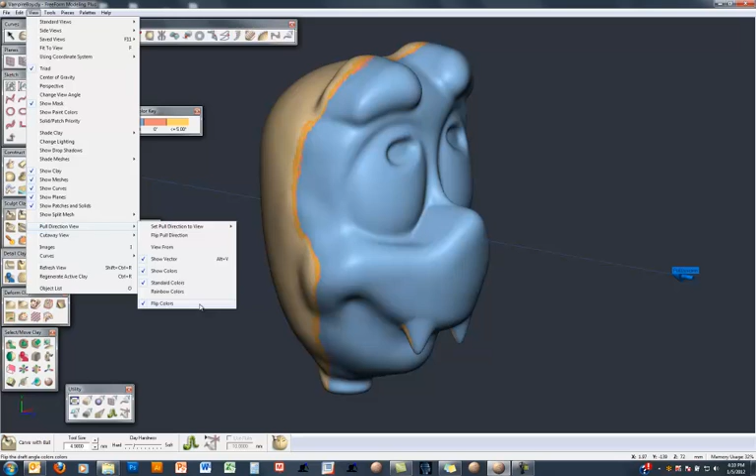And we also have the ability now to show the vector, and you can see it's got a little label called Pull Direction. We're going to talk more about this in a minute. And then the last little thing I wanted to highlight under Pull Direction View is the flip. So we can now flip it. So even though the pull direction is still being viewed from the same direction, we've just flipped the colors. So let's just flip that back. So that's a quick recap of the changes under the View, Pull Direction View.

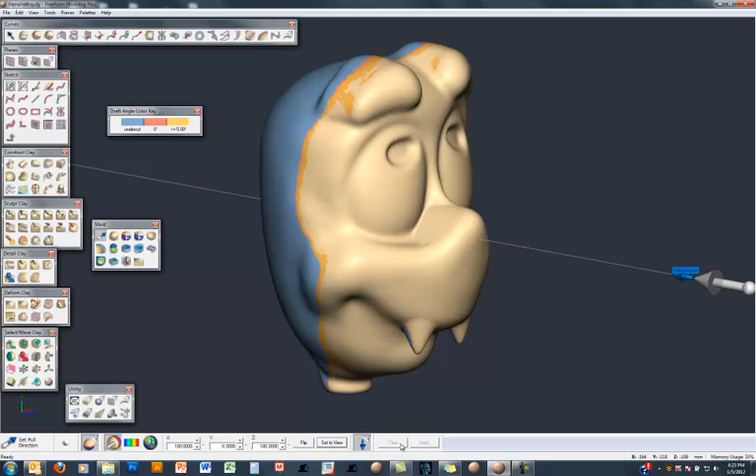And now if we go into the Mold palette, let's take a look at the Set Pull Direction command. Now the first thing to see here is that we're showing the current pull direction vector. This is the vector as it is currently defined. Along the Dynabar we have a whole bunch of new options, and I'll come back and talk about these in a second. If I hold down the G key and rotate, you can see that I'm rotating the view and the pull direction vector all as one.

One thing that is new is that if I just hold the stylus button on the Phantom and rotate, what I'm now doing is rotating the model relative to the pull direction. In effect, it's a dynamic pull direction, so you can rotate this around and you can basically pick the best pull direction for the model that you have. And then when you're happy, you can hit Apply and it'll update the old pull direction to this new pull direction.

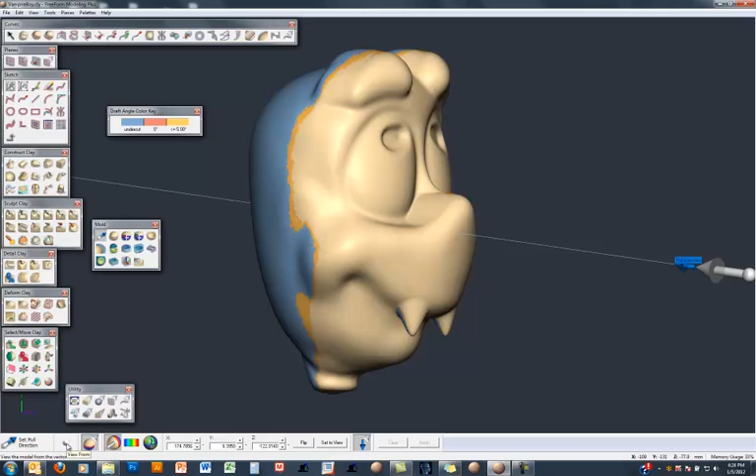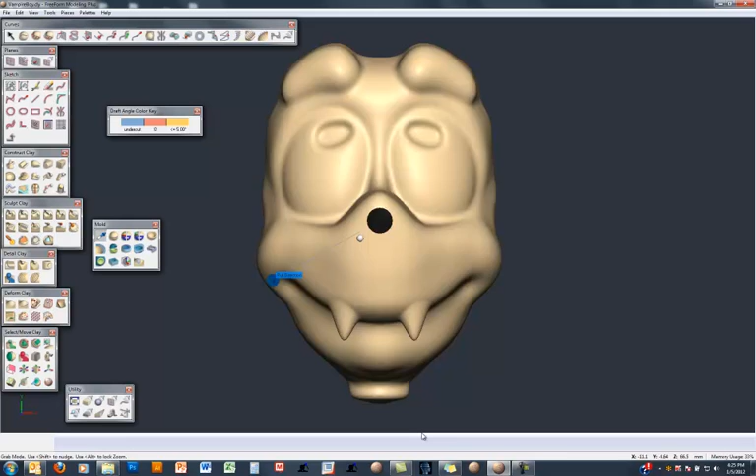I can come back to the first button in my Dynabar and hit View From, and that'll look down that vector. You can also see that in the X, Y and Z we now have the definition of that pull direction vector in X, Y and Z. If I hit F2 and hit Set to View, that will reset to the current view. But remember, I have to hit the Apply button to actually update the pull direction to this new, like, interim analysis, if you like.

I can come here to the X direction and I can actually start changing that X direction, and you see the colors updating as we're moving around. And if you get to something that you're happy with, then again you can hit Apply to actually change the pull direction to this new direction. We can also turn off the colors, turn them on or off. When they're on, we can use rainbow colors, or we can hit flip colors.

Flip actually flips the pull direction as opposed to just flipping the colors. And then show pull direction turns the existing pull direction on or off. And then sync colors: as you're moving things around, you see if they're switched off, then we're not syncing the colors. You can see the colors aren't updating. So it's normally a good idea to have that turned on.

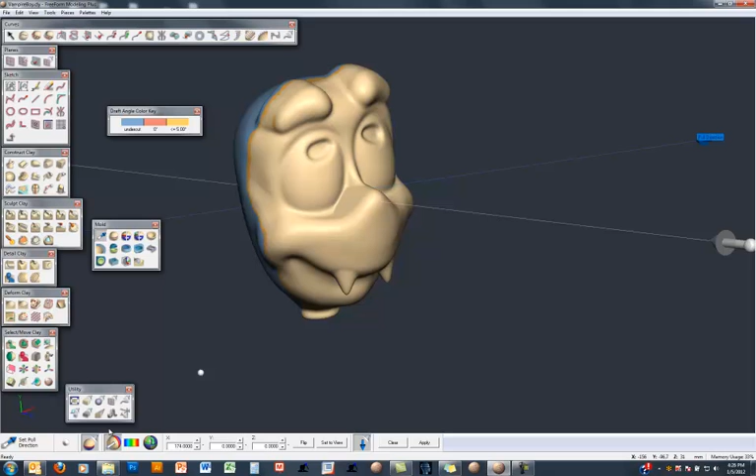Now a lot of this functionality already existed before version 12, it's just that it was kind of hidden and a lot of people didn't really know about it. The thing that is new in version 12 is the ability to hold down the button on the stylus and rotate the model dynamically to define and then analyze the best pull direction, and then as soon as you're happy, hit Apply and you can carry on with your next stage of modeling.

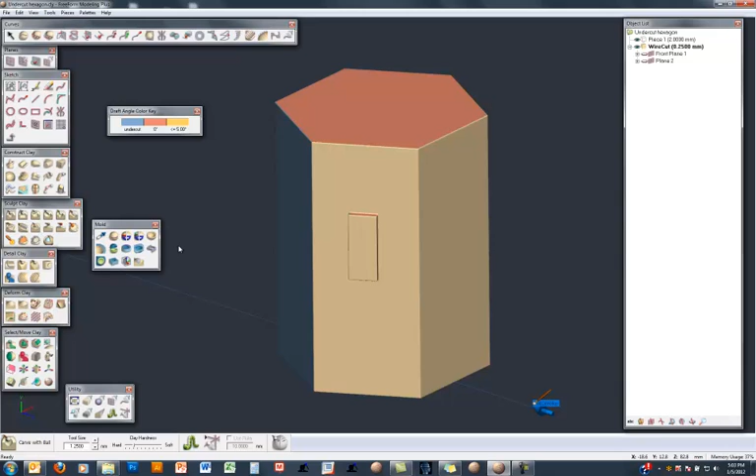The next change I wanted to discuss is some new functionality we've put into Fix Draft and Fix Draft Selection. What you see on the screen right now is a simple hexagon shape with an embossed rectangle. You can see the pull direction. If I look along the pull direction, it looks like this, and then you can see the rectangle that we need to do the draft fixing on. And if we rotate around, you get a better idea of where the undercuts are.

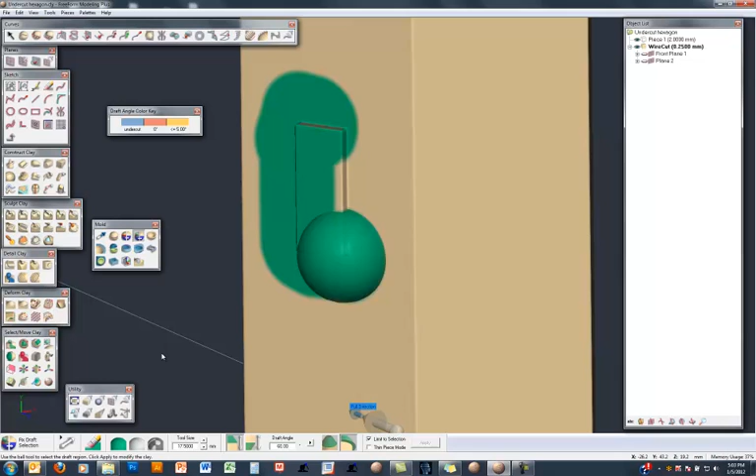So let's go to Fix Draft Selection, select that area, set the draft angle to something that makes sense, in this case 5 degrees, and then fix by adding clay and hit the apply button. And there we see the result.

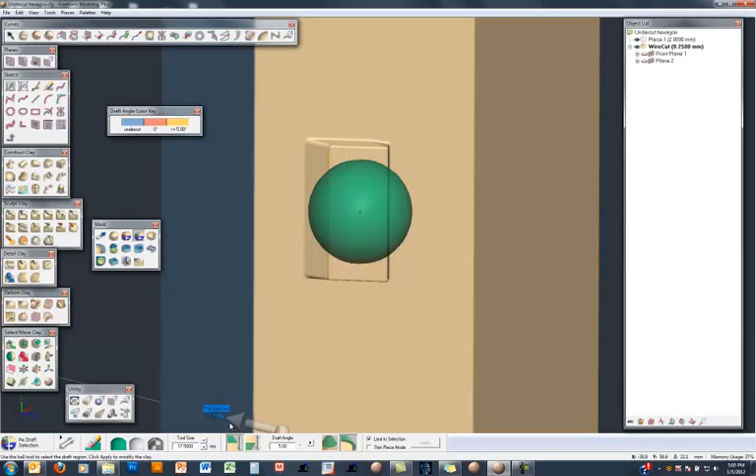Whilst the result is technically good, from an aesthetic point of view, it may not be acceptable. You may have wanted the draft to have come off equally on all 4 sides of that rectangle. And here's where some of this new functionality in Fix Draft Selection and Fixed Draft come in. And this is where we can have a separate tool vector from our pull direction vector.

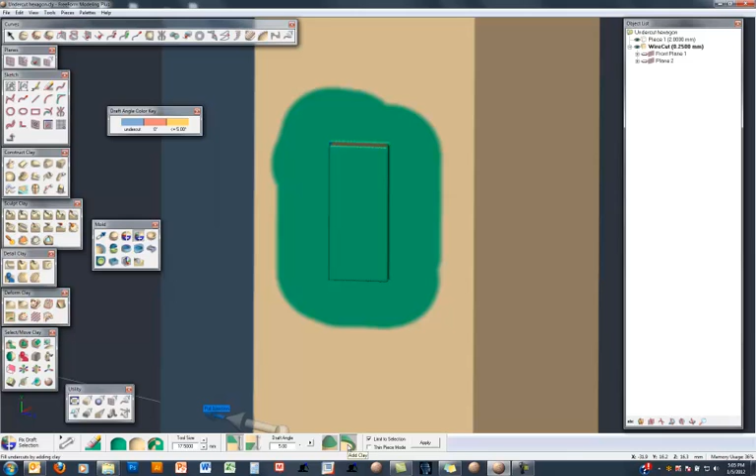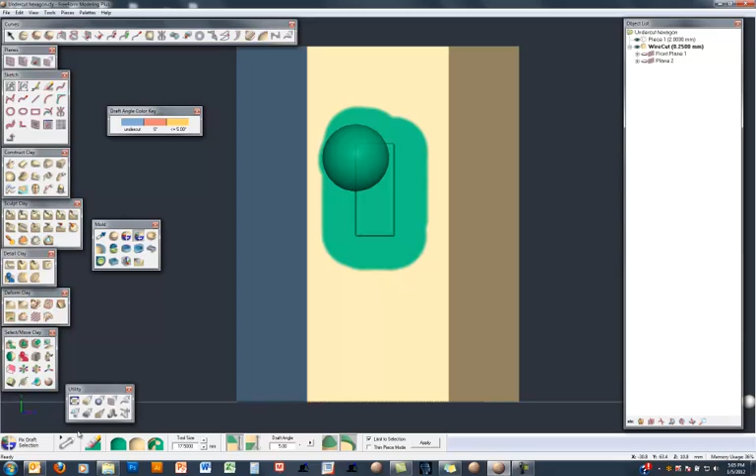So let me undo this. And if I go through and show you the workflow, it'll make more sense as we're working through it. So here's the front, but if I look normal to that rectangle, this is really the view that I want to do the fix draft selection to end up with an aesthetically pleasing result where the draft fixing this rectangle comes off equally on all 4 sides. So I can come to my set tool vector and I can set the vector to the current view.

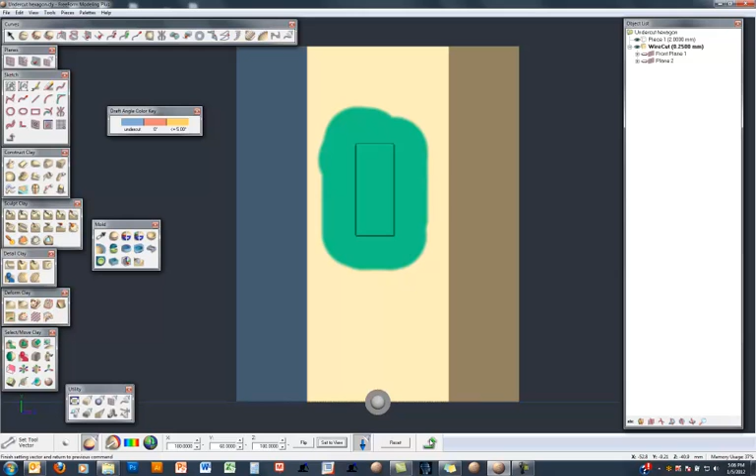And note here as well that I have sync colors turned off. So this is keeping the colors in the same direction as the pull vector as opposed to the tool vector. Then I can go back to the tool, and then this time when I hit the apply button, you can see the result. And now there's hardly a change there.

So I'm going to undo that, type in a much bigger number like 30 degrees and hit apply. And now we're starting to get a much more aesthetically pleasing result, even though we still have that undercut problem. So I hit undo and change my draft angle to something that probably will fix it, like just over 60 degrees. Hit apply again. And there is the result. It's right on the edge of being fixed, but you can see how we have equal draft on all 4 sides of that rectangle, so it's a much more pleasing aesthetic result.

Now if I undo this, go back to set tool vector, and this time hit sync colors, we're now syncing the colors to the tool vector direction as opposed to the pull vector direction. And because we really want to analyze this for mold undercuts for the pull direction, this doesn't make too much sense, but I'm just showing you the difference there between syncing the colors and not syncing the colors.

The last of the changes I want to discuss with mold are under the options. So let's bring up options, and we have a new category here called pull direction. Bunch of things here, I'll come back and discuss some of these in a second, but the first one to look at is the tool vector direction. So this is related to the tool vector that we were just looking at as opposed to the pull direction vector. And you can see there's 3 options here.